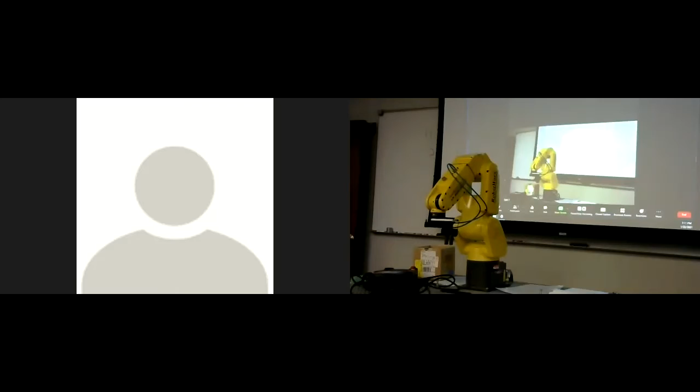Wait a minute, that's not what I want. There we go. I want this. Well, it's good to know I didn't miss anything.

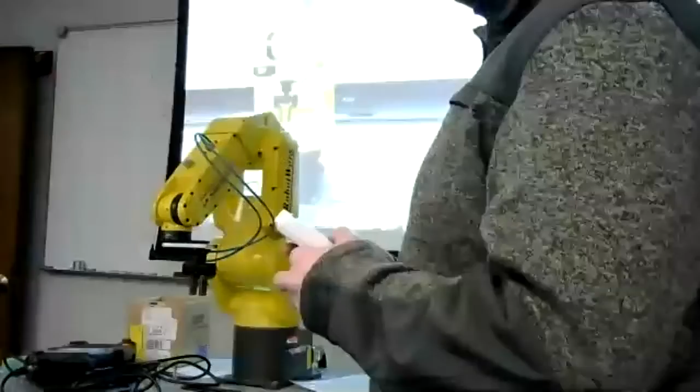Just going to respond to it. I'll set up a Google Hangout for like 1 p.m. Sunday, and that way we can... Oh yeah, so...

I've always been like that. Yes, that's always been like that. Can't tell because it blends in so well. Yeah.

Virginia, if you can hear me, we can't hear you. Can you hear me now? Raise your hand or something. Something weird, can you hear me now? These are virtual hands. Am I out of the way? Can you hear me now? I did.

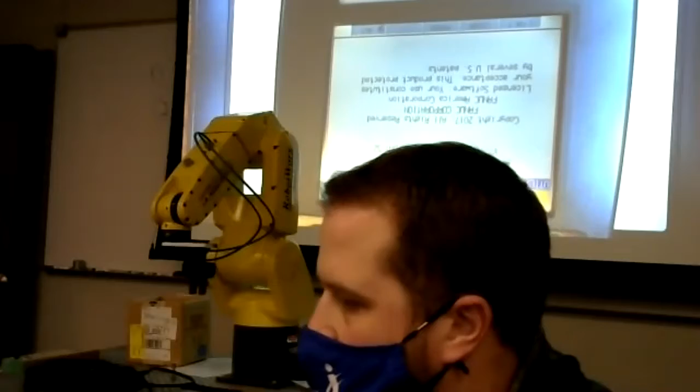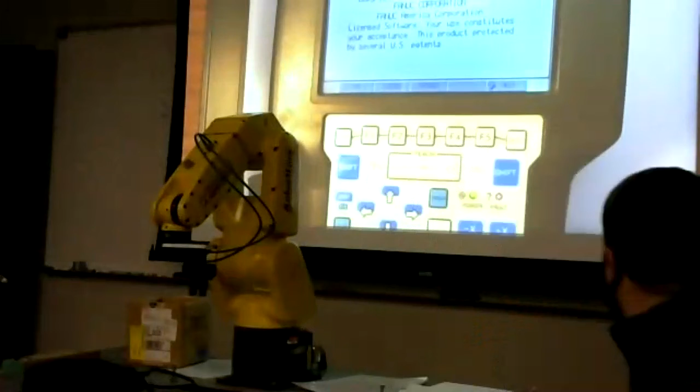See that, okay? Where, at the top of the screen? You can take the bulbs out, just that one bulb. There. Kind of hard to read. Well, I can't do that because then you see the robot. Trying to get it so you guys in... Virginia, can you hear me? See?

Okay, so where are we at on this PowerPoint?

Blah, blah, blah, blah, blah, safety, blah, blah. Remember what this thing's called?

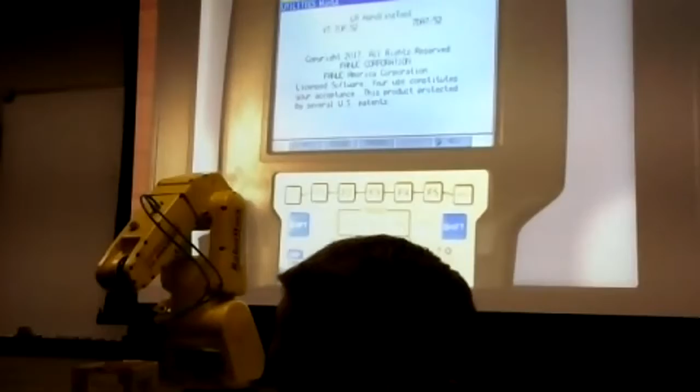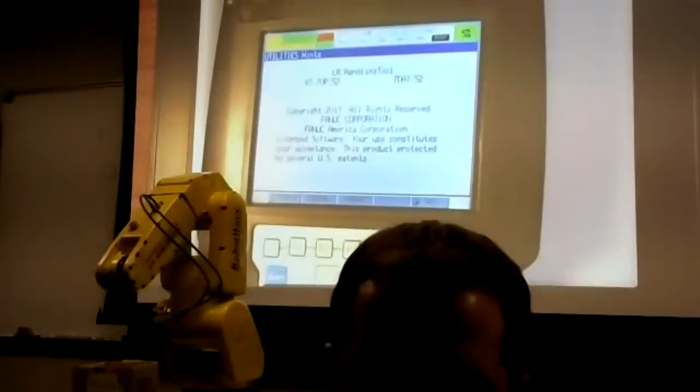And what is this thing used for? Controlling the robot, writing programs, jogging.

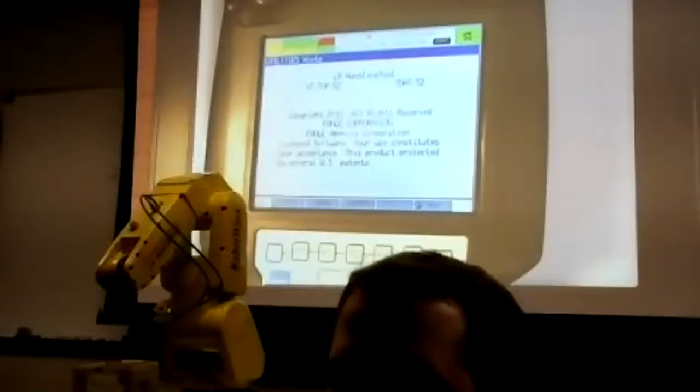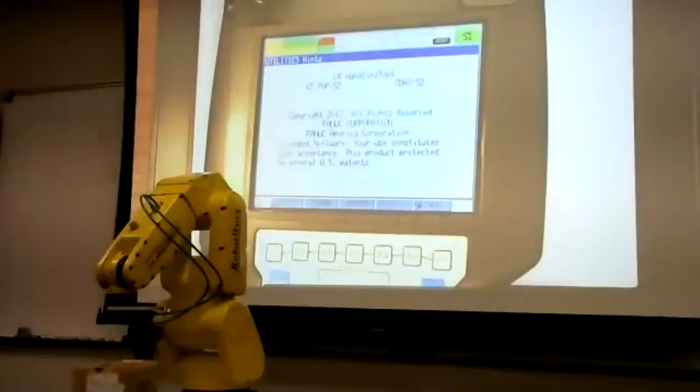It's just kind of hard to see the robot.

Oh, well, I'm done messing with it. Okay, I don't remember which slide we were on.

Parts of the display, teach pendant, button, menu maps, jogging the robot. I think we started to go through this and I started to show you how to jog.

The shift key, blah blah blah. Okay, so I just powered it on. What do I need to do to start moving the robot?

Make sure the e-stop. Good. It's not going to move if the e-stops are pushed in. Right.

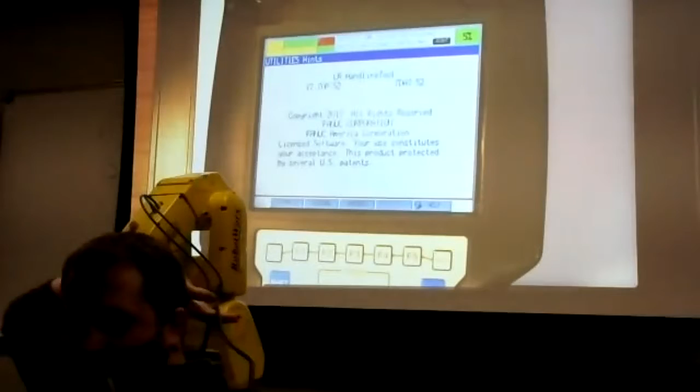So do you notice anything on the teach pendant that's going to show me whether or not I can even move the robot? Oh, the...

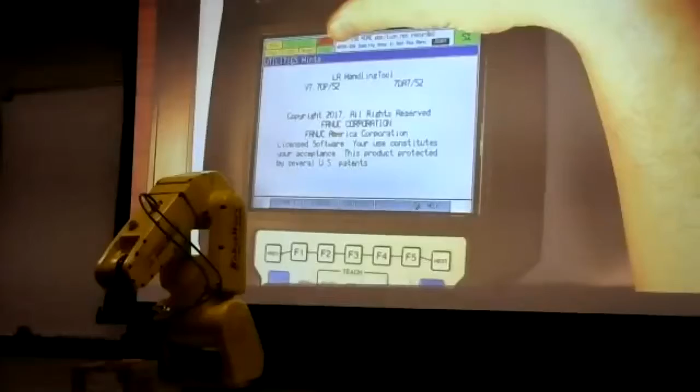Fault. So how do I, the fault's right here. It says APSH 155, home position not recorded. Ruh-roh. Record home position, exactly.

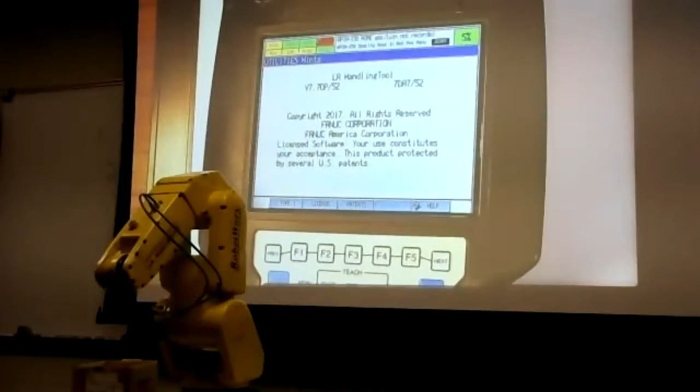I don't know that we need to do that to clear the fault. How do we clear the fault? Remember? Reset key. Reset.

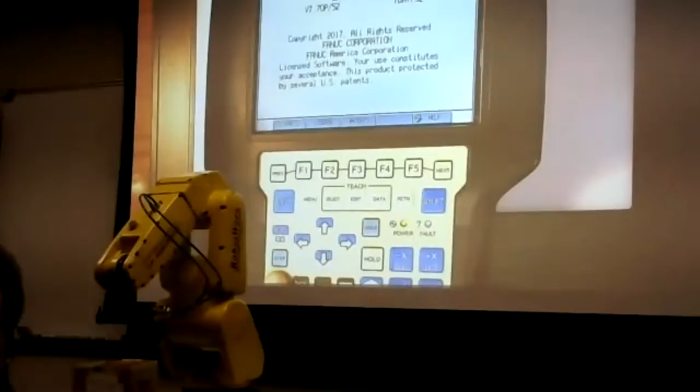Yeah, that's number 6. Reset is here. So if I hit the reset, oh, fault didn't go away. Why? New fault.

Hitting the reset button, man switch, oh, that's it. What does that mean? Hold it down. Where's the dead man switch? Come back. Yeah.

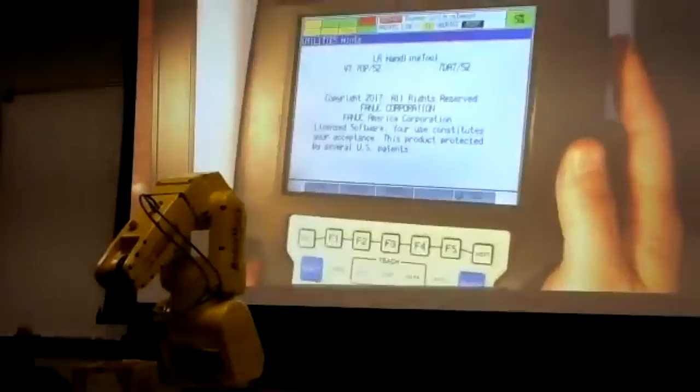Halfway, press that. Just halfway, just the tip. Can't be forward, just, yeah. Reset. Oh, there it goes away.

We're all green and yellow, so we know we're good. You will know what some of these other things mean later on, but for now we can go ahead and jog the robot. So I'm going to hit, what do you want me to hit?

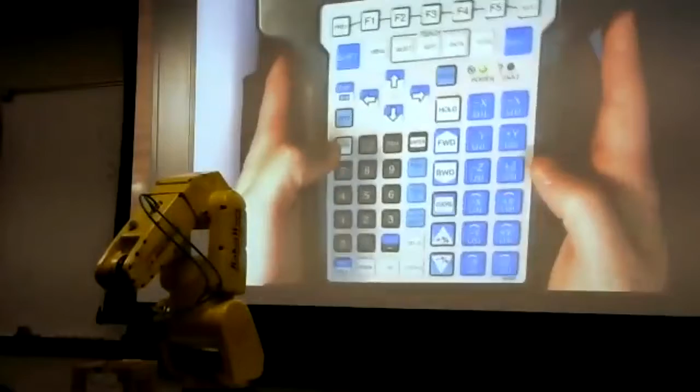Z plus. This one? What's that going to do? Raise it up. Which way? Just one joint or all of them?

One joint. How do you know that? Because we're in joint mode. So Z plus is joint 3, so 1, 2, 3.

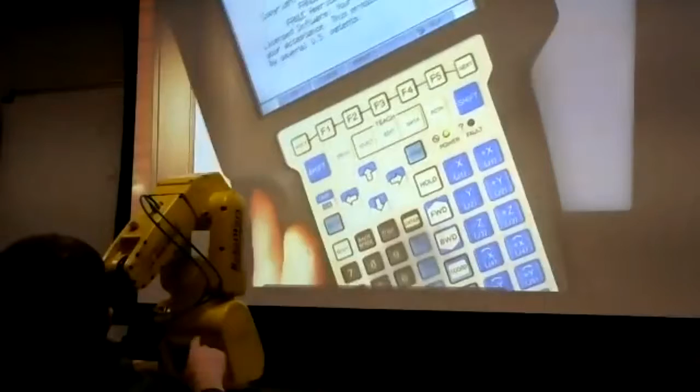What did I just do? What did I do? Hit a button. Of course.

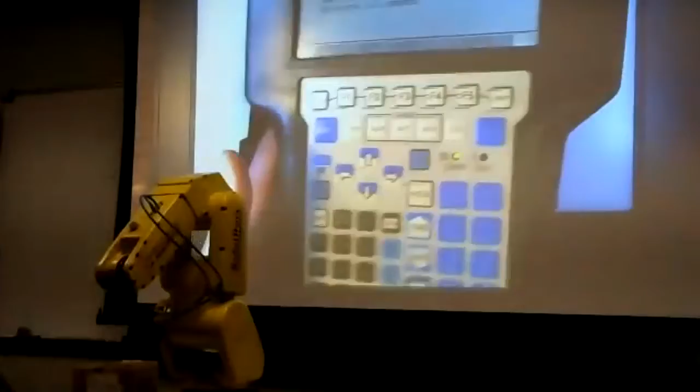Here it goes, you're back. Thanks, Brenna. How did you do it? Round of applause for Brenna. Come on, I didn't do anything. You just turned it off, turned it back on. Okay, let's start it over.

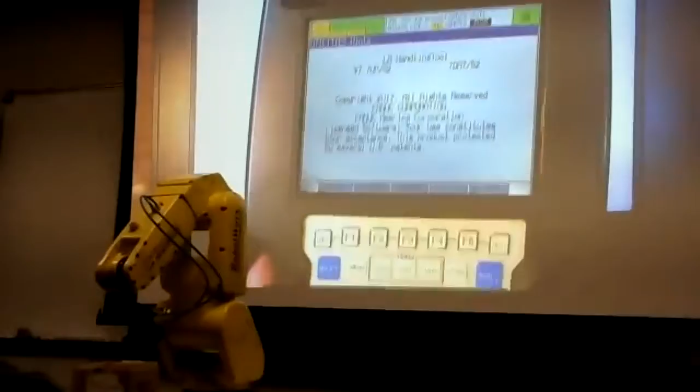Why not? Jog press before shift, you gotta hit the shift button first. You have to hit shift, which is here, or you can press this one, but I'm already over here with the dead man hand. Shift and then plus Z.

I will knock it up to 50. Oh, here's a little shortcut for you. This is handy, okay? You see the speed right now is at 50.

It was at 5, right? So just by default, when you power it up, it'll be at 5%. If I hit the percentage up, which is this button, it'll go up in 5% increments, okay?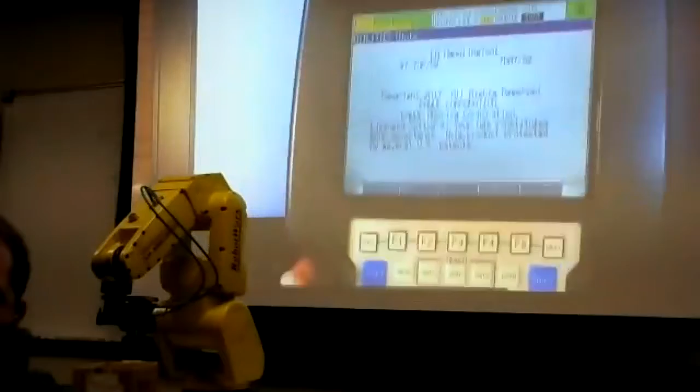But if I hit shift and then up, it'll jump to 50 and then to 100, right? So I'm just going to go to 50 right now. That's enough for me to not get whacked in the back of the head by this thing.

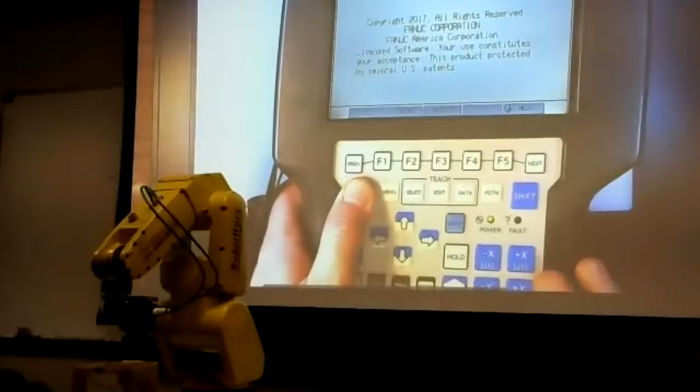Okay, so I'm at 50%, plus Z. It moves a little faster. So what if I hit Y? What is that? Which joint's that going to do?

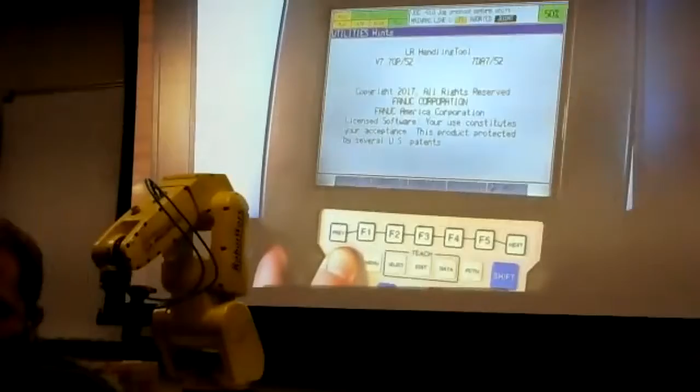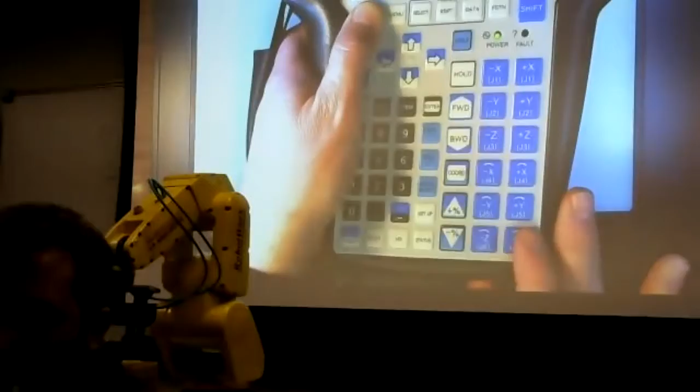Y would be joint 2, so this one. So there's Y. And then here's X. Rotate it left and right. And then yaw. So these X, Y, and Z should be yaw, pitch, and roll. And let's just keep working your way out on each joint. So yaw, this one, pitch, and then roll. So I'll do those one at a time.

Yaw, pitch, roll. So that's jogging in joint mode. You remember what world mode is? It moves all the joints simultaneously. So we're going on the Cartesian coordinate axis.

So plus X, if you remember, I remember it by where the cords plug into the back of the robot. So this is plus X. Y is going to be this way, and then Z is going to be straight up and down. So I'll just show you those real quick. I'm going to change it to a different mode to do that. You hit the coordinates button down here, and you'll see the mode change, jog frame, world.

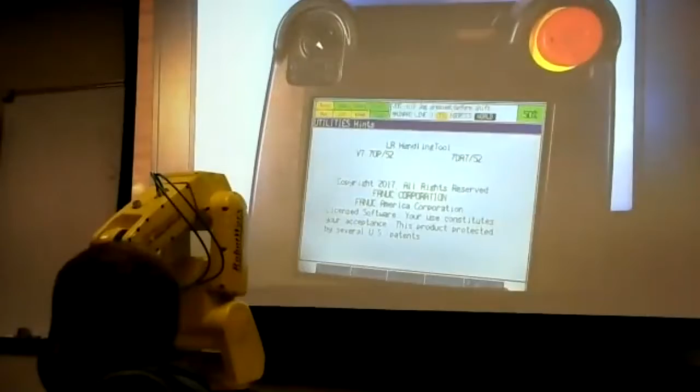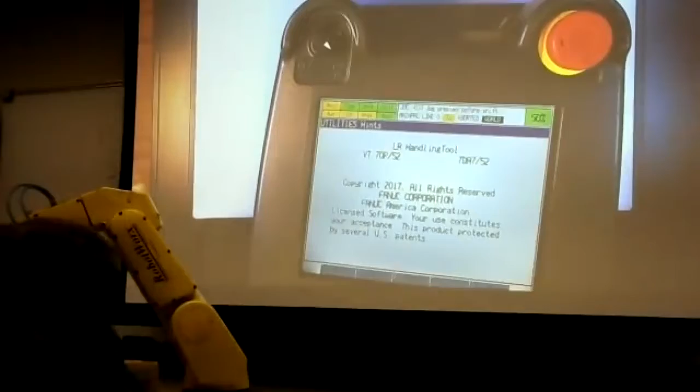So then Y would be this way. If I hit minus X, it's going to go straight in towards the whiteboard. See that? One thing you guys may run into is this joint right here will not spin 360 degrees and then keep going. So if you run into a fault where you're trying to get it to go that way and it stops, watch, it's rotating this thing as I go in the minus direction. You might run into an error where that joint gets hung up right there. That's why. So you just have to rotate it all the way around.

The other thing you got to keep an eye on is this, so that those things don't get ripped off if you're swinging that thing all the way around. So that's world view. The first lab: jog with joint and world views. Easy enough. And so you should have enough information by now to do that.

Let me see. Lab 2. Move an object. And that is going to be getting into programming, which we haven't talked about yet. Okay. So we talked about, I'm on slide 15. We talked about jog speed, coordinate system, minor axis wrist jogging. So that is the yaw, pitch, and roll, right?

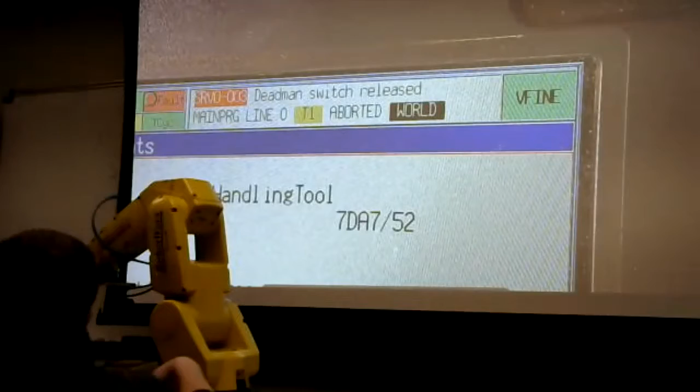You're going to use this if you want something to be really precise. So let's say I wanted to pick this cap up and then put it on this pencil. I might go like 50% over to here, 5% down, and stop, and then do another point that's very fine, so it slowly goes down there, because this thing might not sit exactly straight the whole time, right? And you're going to do some labs on these pieces of paper. We got some dry erase markers where you'll have one program that is trace this outside rectangle.

Okay, and so when you're jogging, if I jog from here to here, depending on how this thing is oriented on the table, let's say this is oriented so this is the plus Y direction, that's great. It should go pretty close to there if I jog it over this point. But if this thing's oriented like this on the table, I might have to do this and then straight down, right?

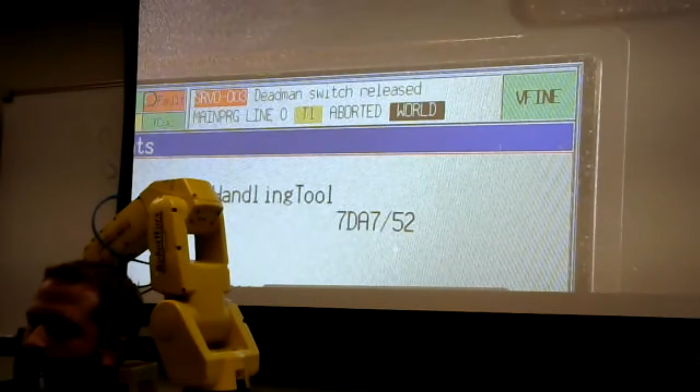Just to get to this one point. And then, as I'm bringing the marker down, you might want this thing to have a really fine control where it hits right on that corner. So that's just another thing to keep in mind when you're using jog mode. When you're putting the points into the program, which we're going to talk about next, you actually put into each specified point which motion you want it to get there and how fast.

Yeah, there's a couple other things. So you will define that in your program, so every time it goes to that point, you're going to tell it, I want you to go to this point, and I want you to do it fast, or I want you to do it very fine, okay? Follow?

The other coordinate system that we're going to talk about later on is tool. So we've got world frame, jog frame and user, which you can play around with, but I think you're going to find that world is the best way to create your programs. Blah, blah, blah. Go through joint mode, XYZ mode.

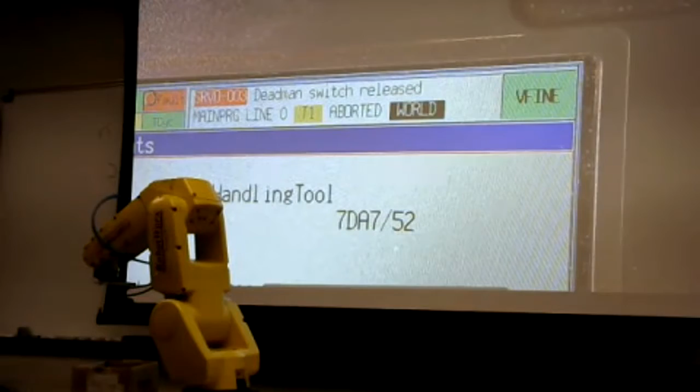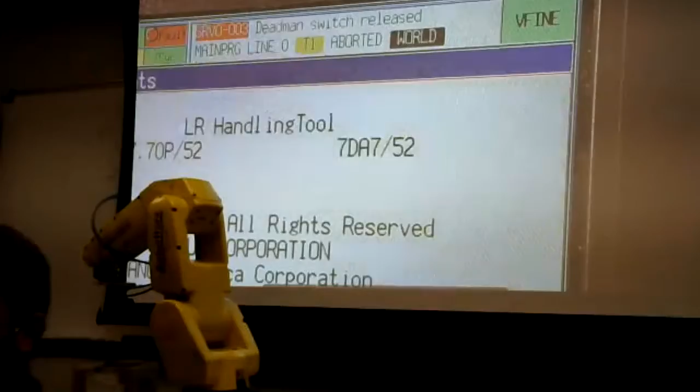All right, now that we're getting into this, you really need to know how to create a program. So why don't I just tell you that? To get to the programs, you're going to hit this menu button. No, you're not. You're going to hit select. These are all the programs that are in there. Main program, Mark 5, blah, blah, blah. I'll probably have to go through and delete some of these because we don't have so much memory. But

Create is F2. So these are called soft keys. Whoops. This is not a touch screen. It doesn't recognize when I do that. So right now, these F1 through F5 are associated with these soft key buttons up here. So I'm going to hit create. Can you guys read that on the screen where it says create? Okay, because I can't read it just looking at this. But I think it's F2, right? This one? Yeah. So I'm going to hit F2.

I'm going to give it a name. It gives us options down here. You can have words, and this is just telling you what you're going to get on the soft keys. So I got words, and right now it shows program, main, sub, and test. So if I hit F1, it's going to say PRG. Okay? And then if I want to put in some uppercase letters, I'll select that. And then down here, it's kind of like, do you ever have a flip phone where you use the buttons to text?

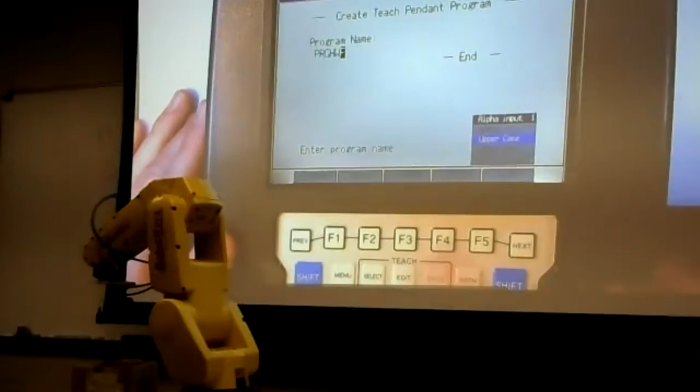So if I want to call this program, whatever, H, so I hit that twice, and then W, S, T, U, V, W, and F. A, B, C, D, E, F. Program HWF. You know what that stands for? Program homework fun. Yeah, me neither. Okay. Enter. Now we're at the point where we can teach points.

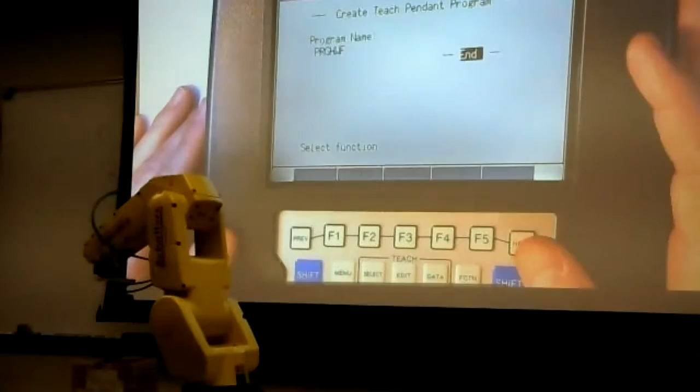So if I wanted to record the first point being exactly where that robot is right now, I would press, there you go. Oh, you gotta hit the edit button. Now we're in the programming, okay? So it tells you what the name of the program is up here, and this is what it looks like when you start putting in points.

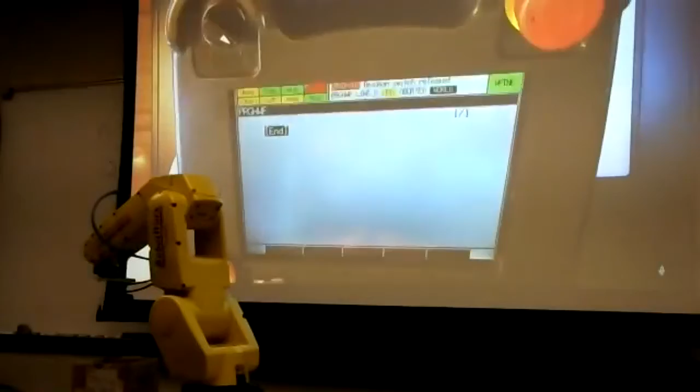So I have some options down here at the bottom. Point, touch up, and then you see this little arrow over here. Hit the next key, and I also have instructions and edit commands, which are some other helpful things that I'll show you later. So I'm going to go previous. Where is it at? I'm going to put a point.

So I'll hit point. So I'm going to teach it that point that it's at right now, which, by the way, if you ever want to see where that point is right now, relative, it's always the default home position, or 0, 0, 0, 0, 0, 0, is right in the middle of this joint. So inside where I can't even put my finger in there, right in the middle of this joint right here, 0, 0, 0, 0, 0.

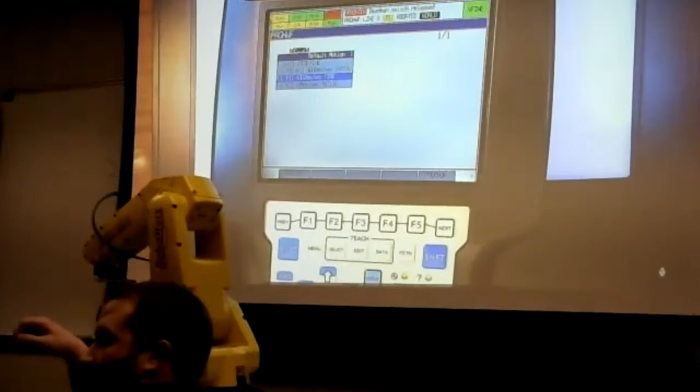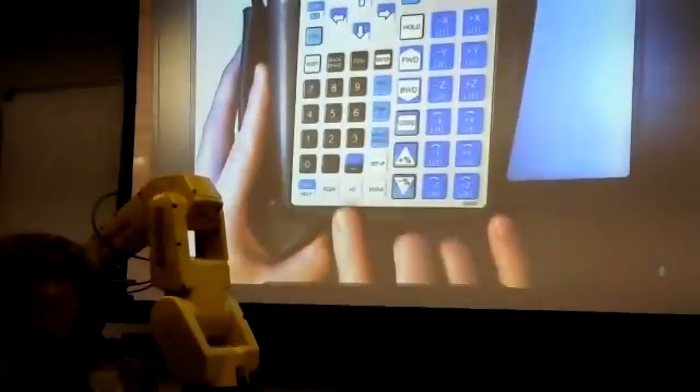So if I wanted this thing to be at, I don't remember if it's inches or millimeters, but let's say it's inches, and I typed in there, you can do this by the way, 10, 0, 0, 0, 0, 0. It will home everything to 0, but it will be plus 10 inches on the x-axis. Does that make sense? So if I want to see exactly what those points are, I can hit down here at the bottom, there's this position key, and that will show you, right now we're at x minus

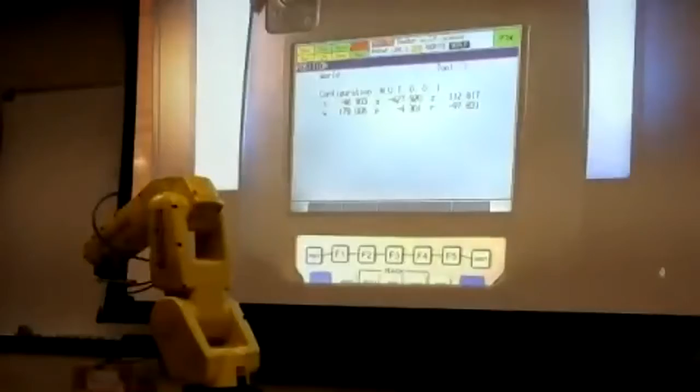46, which actually must be millimeters. It's the x direction if we're 4.6 or 46 millimeters. I don't know. Unless somebody zeroed it out somewhere else. Let me see if I jog this in the plus x direction though. That moves. Get moving, it's verifying. Oh. See the x moving? Yeah. All right.

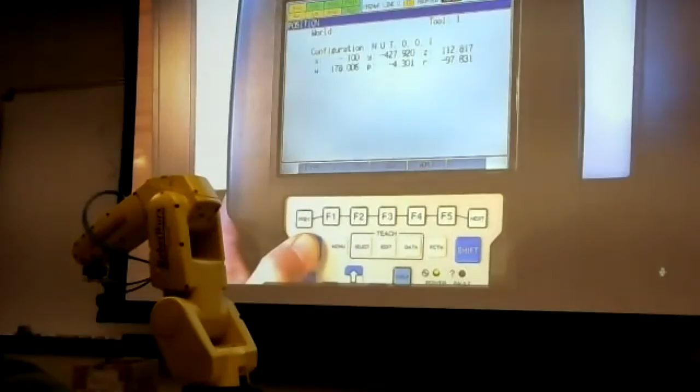I want to get back to 0 and see where that's at. That's pretty close to 0. Yeah, I guess that is pretty close to there. I just don't remember. Anyway, this is not important, but this will show you exactly where all these things are, or where that thing is relative to the 0 point.

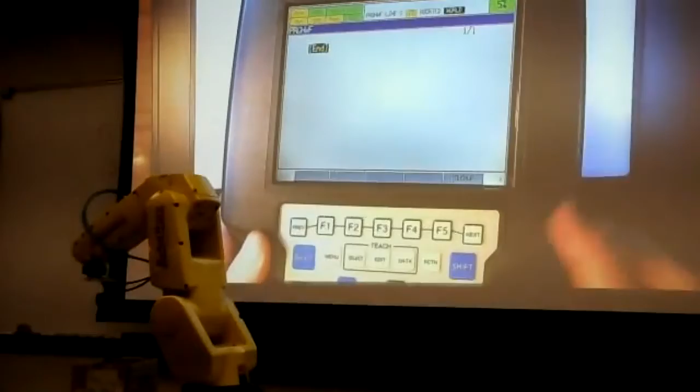So, okay, I want to go back to my shortcut to get back to your program. I hit select, and there's my program H homework fun. Enter. I still have not recorded a point. So if I want to put this point in there exactly how it is, remember, that includes yaw, pitch, and roll. However I want it, exactly how it is, I hit point. Now it's going to give some more options. Let me zoom in here.

It's going to say, hey, bro, you want to put this in as a joint point number whatever at 100% fine, or do you want to do C, which is a circular motion? We'll do that later on. Or do you want a linear point, or do you want a linear point at this speed? That's what those options mean. Don't worry about circle right now, but right now we're going to talk about joint versus linear.

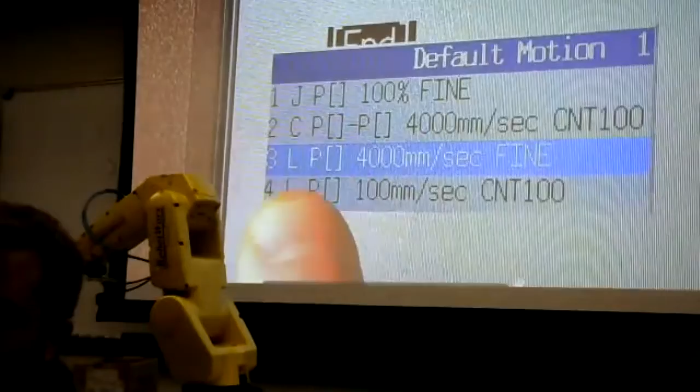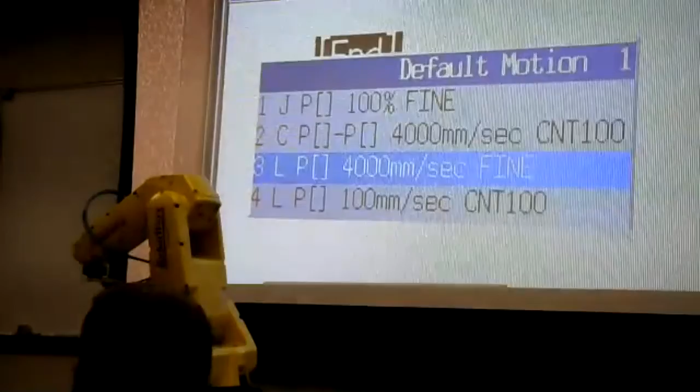All that means is that if the robot is, say the arm is out here, and I run this program, it's going to highlight this first point. Remember where it's at right now? It's going to get from here to there somehow. And what you're telling it with linear is you want the end of the tool to go in a straight line to that point. So if I'm over here with the tool and I tell it to go there in a linear motion, can it do it? No, because it's going to say, hey, bro, I can't go through the machine. It's going to give you an error.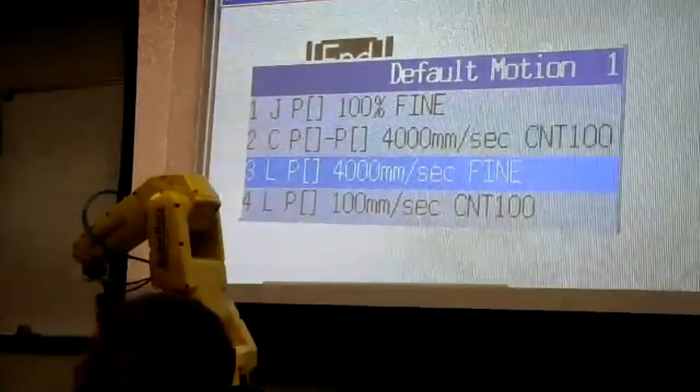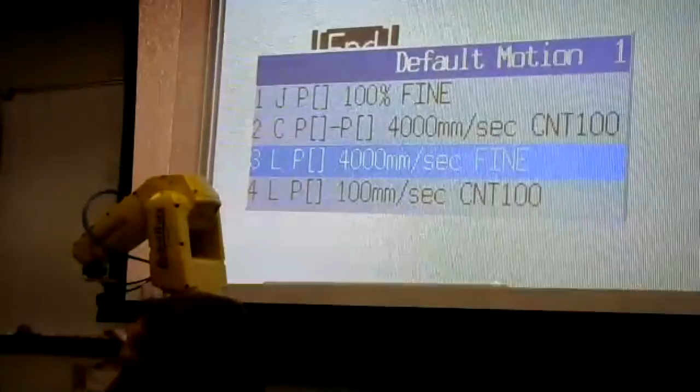Joint, though, will use whatever is most efficient in joint movements for it to get from this point to there. Does that make sense? So it's kind of random. The robot gets to decide exactly how it wants to move there. So if it's unimportant how you get from this point to there, you just put joint. So that's what I'm going to choose. Enter, and there's your first point.

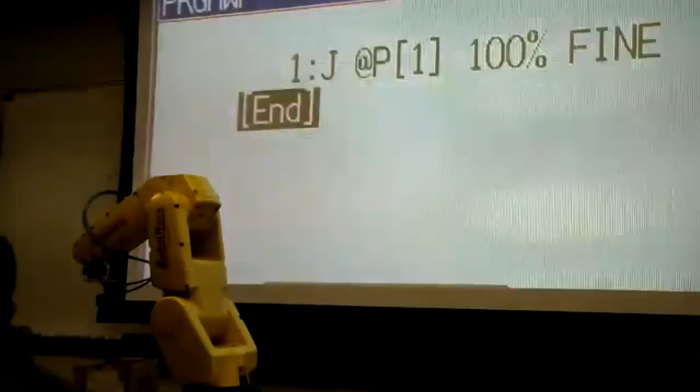Now I'm going to jog, and let's say I want to go pick up that pen. So I'm going to jog it. I'm in world. Where did I go? I'm in world. Over to that point. So I'm going to go plus X to get it this way, plus Y to get it that way. I guess that's minus Y. I don't know if we're going to be able to reach that or not, but we're sure as heck going to try. You know what I'm saying? Yeah. You're getting close.

And by the way, in a program that I'm writing, I will put the thing exactly over the pen, and then I'll raise it up to record that point. Does that make sense? So instead of guessing, am I right on top of that thing? I'll put it right around the pen and then lift it up and record that point. So that's what I'm going to do. I'm going to bump the speed down.

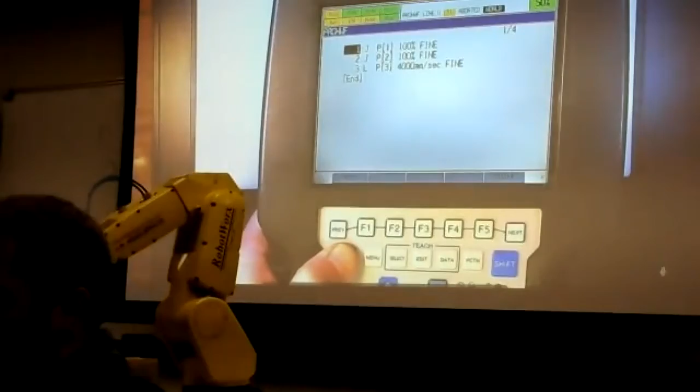Okay, so I'm going to go back to 1. I'm going to hit shift and then forward, which is right here. This will run the program. And you can watch the robot and the screen. It will go through to each point and put the robot where it's supposed to be. So the other thing is you have to keep holding the shift button down. This is just in program mode. So like, remember the key switch that's on the controller?

If you go through and write this big long program where it's just doing its thing for you, let's say you want it to write Brenna's name over and over on a piece of paper, you write that program and then have it repeat itself. There's another way to do that. And then that key switch allows you to start that program and it'll just keep going forever and ever. But right now when we're in this program mode, it's just going to run through till it gets to the end of the program and stop.

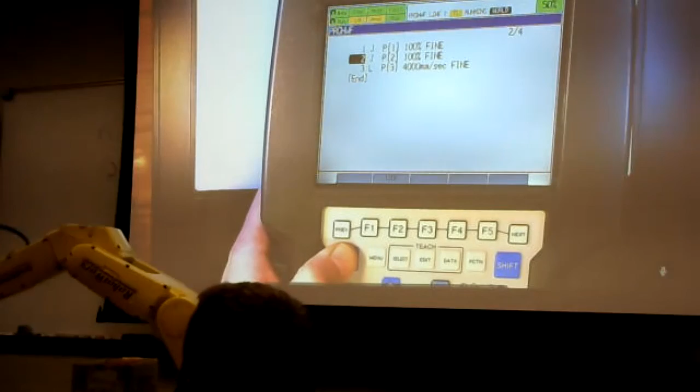Okay, so here goes. Shift forward. Ready? So now it's going to go to that first point. Now it's going to go to the second point. And then it's going to go straight down and stop. So that's your program that you just put.

10-4? All right. Monday we'll talk about putting an instruction in the program. So that would be the next step for, say, Lab 2, where you're going to write a program that does what I just did, but it's going to pick up that pen and then move it to another location. Follow?